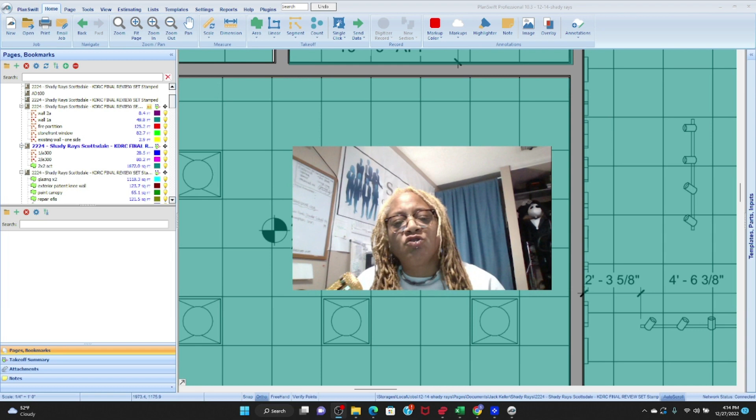Everyone. In this video, we are going to review all the sheets necessary to produce a drywall and framing estimate. Of course, we're going to do our three-step process, which is a very detailed takeoff, very detailed man-hour totals, and then a very wonderful professional Excel spreadsheet.

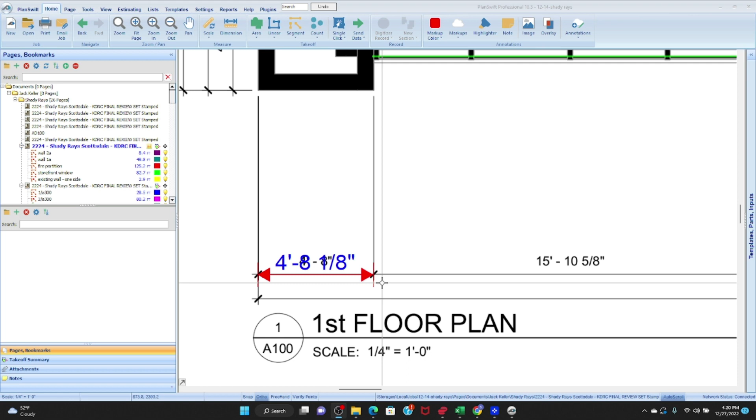All right, now we are looking at a small retail facility where we are going to do the takeoff here for the framing and for the drywall. And of course, if we are the framer, we need to look at the floor plan, make sure it's to scale, check the scale, which we did here, and start looking for any description that tells us the types of walls. Because this is already an existing facility, we need to be thinking about a few things.

First, the new walls that are going to be built are going to be marked out like these are here. These are wall tags telling us that we have wall 1A and wall 2A. And so somewhere on this description or on another legend or another detail sheet, it's going to give us the description of what wall 1A and 2A are made out of.

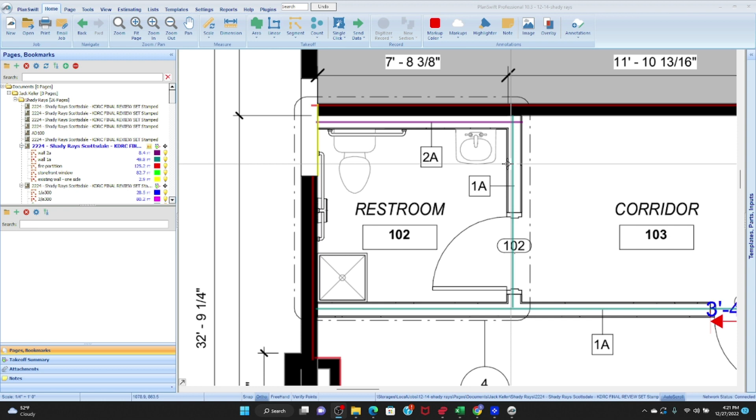And the one thing to always be aware of, whether they call this wall 2A, 1A, or whatever, you want to make sure you note which of the walls have drywall on both sides or which do not. It appears that wall 2A is up against an existing adjacent wall, so you want to make sure when you are determining that. But then again, the wall legend should tell you that wall 2A is a new wall that has drywall only on one side.

One other thing you need to always make sure to do is to look at the specifications for the finishes, and that's where our drywall would be noted, in the finishes division, and that would tell us what level of drywall finishing this drywall should have. Okay, and that's very important. Level 5 is very labor intensive, so your labor rate for that is going to be much more.

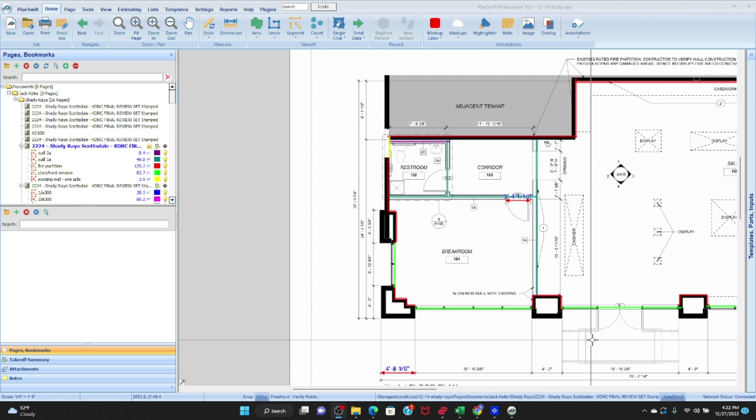Okay, and so we're going to break this video, like we do all of them, into 3 parts. Our first part is always a very detailed takeoff using a digitized software.

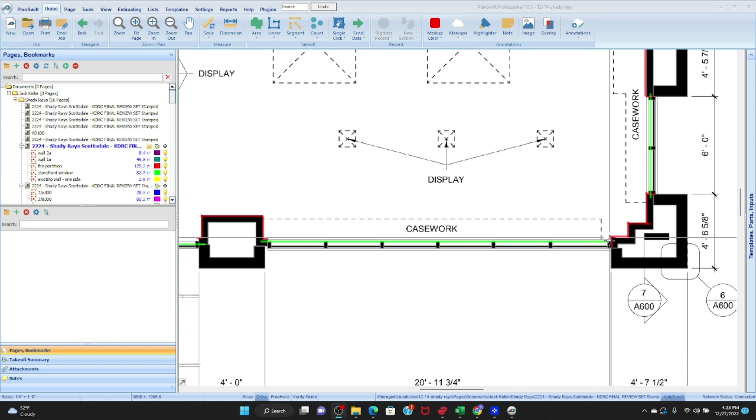Now, again, when we have an existing building, we need to always look at the new wall construction. We always need to note what is going to happen with the existing walls. Do we need to finish those existing walls? And in this case, we have a good interior elevation marker. So what does that do? That tells us, if we look at image number 1 on page A400, we can see the finishes or how the wall is here. And 2 shows us all the wall finishes here, right? 4 shows us all here.

And so I'm almost certain, anytime you have a renovation, you have to prep the existing wall. So is that part of the demo work? And we did not complete the demo work for this. So those are all things that the drywall person needs to be thinking about. All existing walls, do I have to prep those for new paint, or is that something that's not even in my scope of work? But again, the specifications are going to tell you.

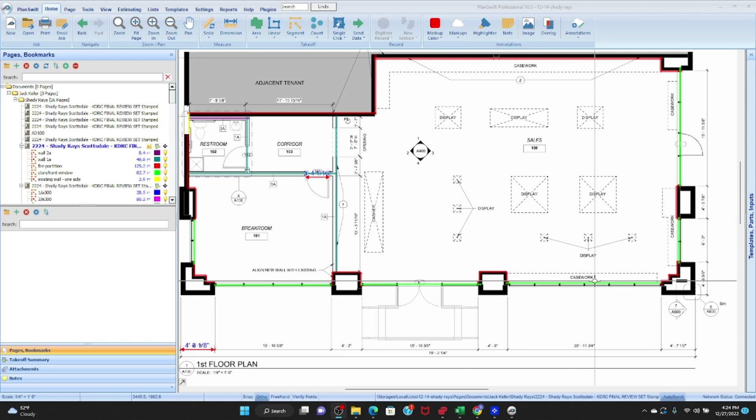Okay, so let's look to see what types of walls, wall 1A and 2A. And this again is step 1 of our 3-step process. Step 1 is always a very detailed takeoff. Okay, step 2 is what? Going to a cost book that's based on industry standards, getting the cost of material, and, more importantly, getting the man-hour rates based on industry standards.

That's where our 3-step process is always going to help you win, because you're going to have a reference guide to tell you, based on industry standards, how long something's going to take instead of guessing. And you never want to do that if you're doing competitive bidding.

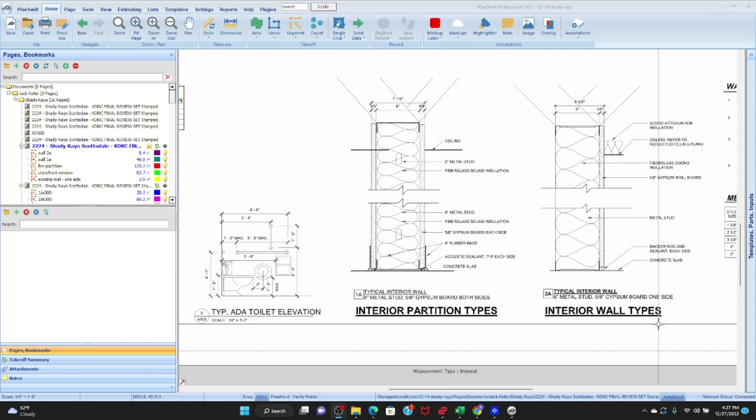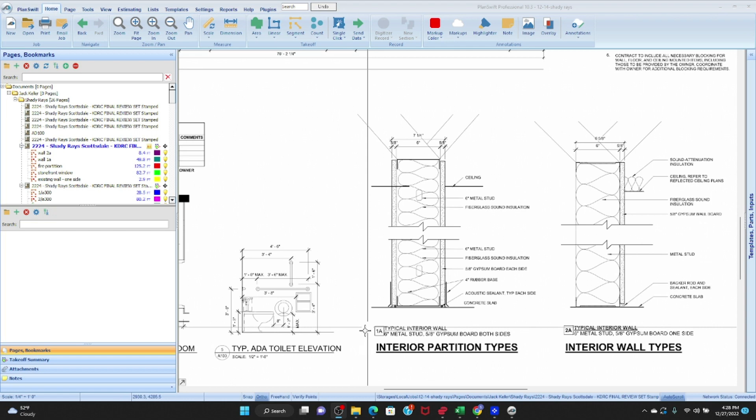So let's get back to framing. We know from our interior partitions, interior wall types, it's going to show us here. Looks like they're all going to be braced at the roof joist. That's usually what we have going on right here. We know the walls are going to go about 6 inches above the ceiling. Well, in this set of plans, we really don't have a good section view to tell us the exact height of these walls. But we know that wall 1A is 6-inch metal,

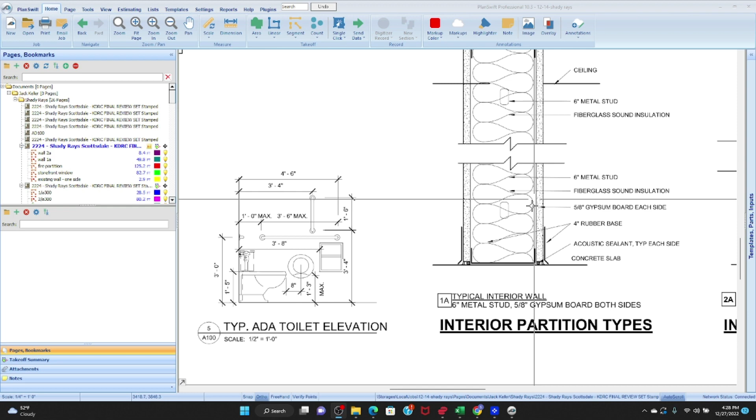insulation, acoustical sealant, typical on each side, top and bottom, so we do length times 2 for how many linear feet of sealant. And then the insulation: the square feet of insulation would coincide with the same square feet of framing. But if we are doing drywall on both sides, the drywall square feet would be twice the framing. So that's wall 1A. Wall 2A is the one up against the existing where we only have drywall on one side. Okay, so that's easy.

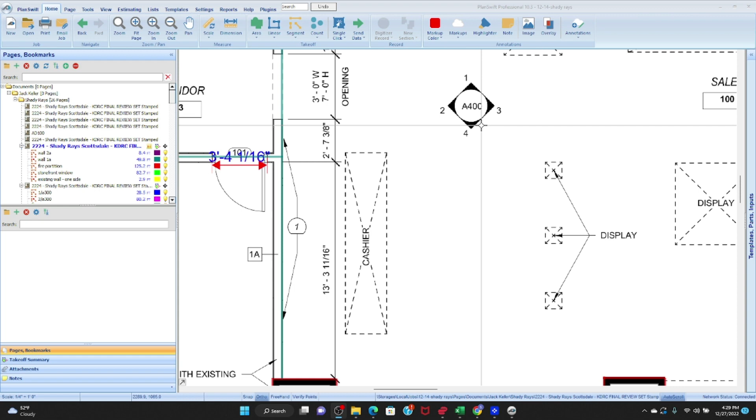And then we marked out the existing walls and what we need to do with those. So we look in the specifications under the finishes for drywall, because it will state whether the painter has to do that, or if that's part of the demolition scope of work. That's very important. But as far as new walls, the only new walls are the ones we have in blue, and this is how they're built.

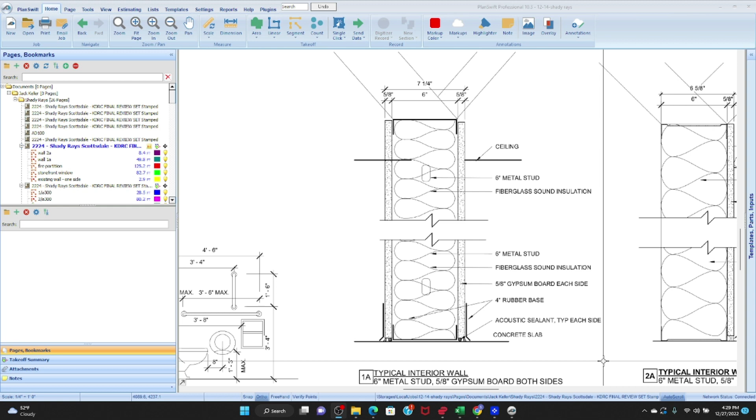Okay, so the first sheet the framer looks at, of course, is the floor plan. That's all the new walls coming up from the floor. Then we have to transition to walls coming down from the ceiling, or any ceiling framing. So we're going to go to the reflective ceiling plan.

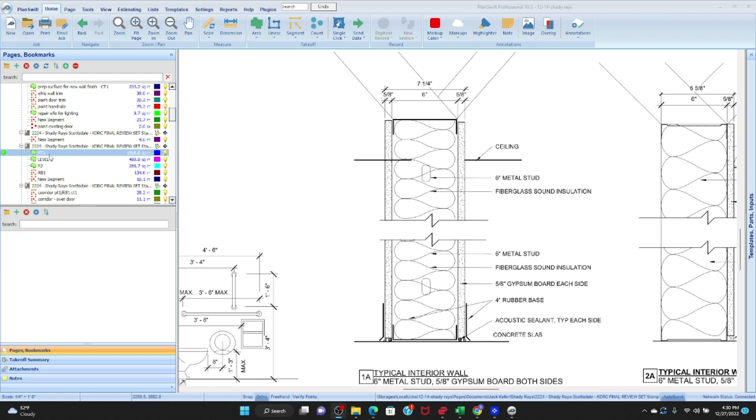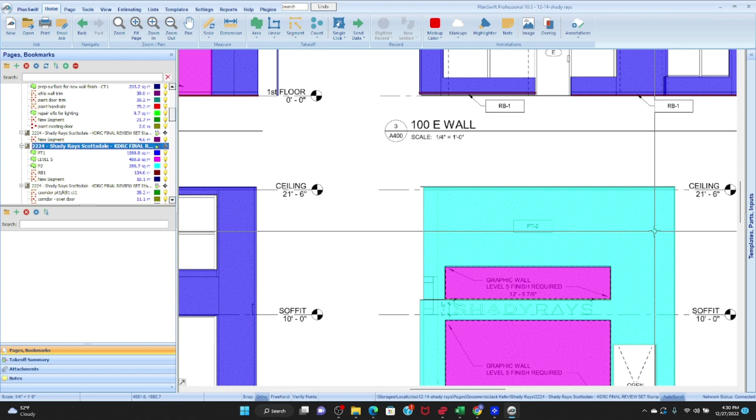Now this is our interior elevations. So all of the existing walls, I know the painter has to paint them. So I need to find out if I, as the person installing new drywall, have to be the same person to prep this existing drywall for new finishes.

All right, so here's the ceiling. In terms of drywall, there is no new drywall and no new framing for the ceiling. The only thing we have for the ceiling, even in the bathroom, is the acoustical ceiling tile. Now, remember I said that we did not have a height or section view to determine the height of our new walls.

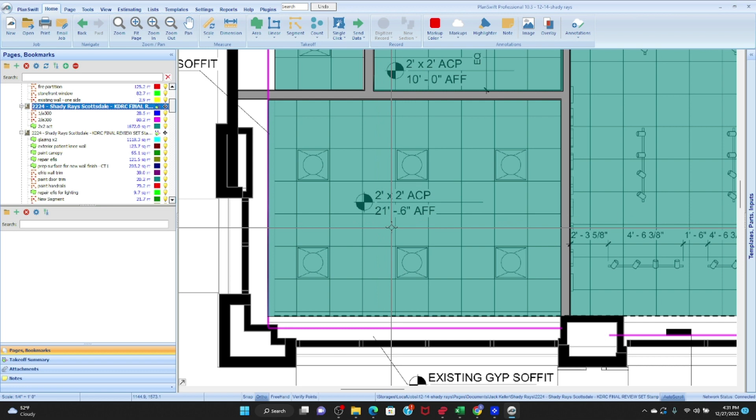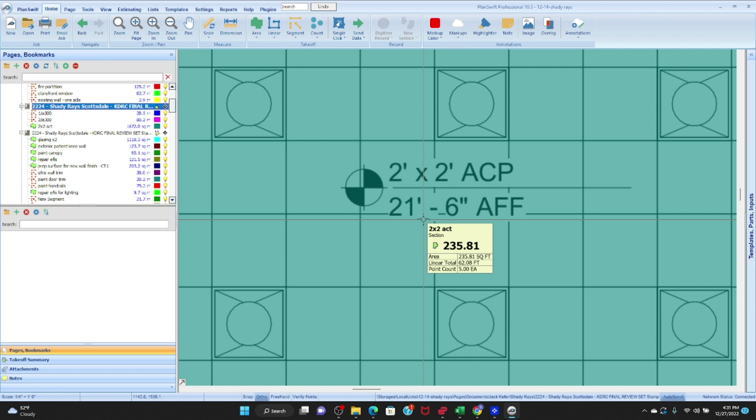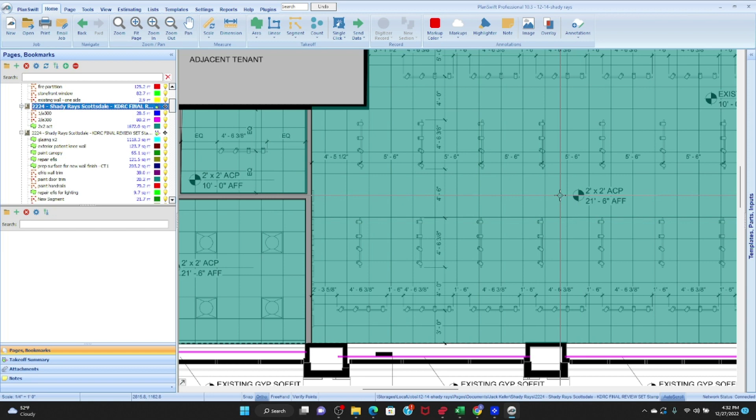So what you can do is go to the reflective ceiling plan. Its job is to mark each ceiling to give you the ceiling finish, which in this case is 2x2 acoustical ceiling tile, and the height of the ceiling is 21 feet 6 inches. So I'm going to use, and I'll tell my client, a 22 linear feet ceiling height. And as far as finishes, if I'm doing them, this is all acoustical ceiling tile, so I need to get how many square feet of that. That's what the reflective ceiling plan is for. But also, I have the existing soffits.

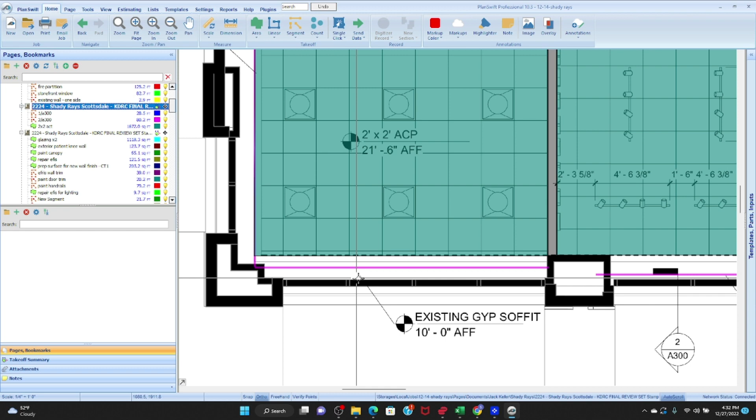Okay, and so I need to see, as far as, again, prepping those, is that part of my demo scope of work? Or is that something that should be included for the painter, or something that should be included on the drywall scope of work as far as prepping existing walls and ceilings? So that's the only question for that.

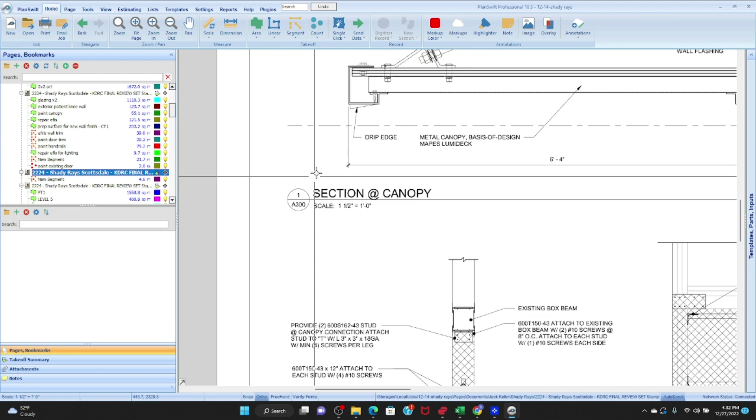And then let's look at the section view 2 over A300. Okay, so 2 over A300 is going to give us this. So this is the soffit that's on the interior. So in terms of painting, I would need to adjust my wall prep numbers to account for this part of the soffit and this part.

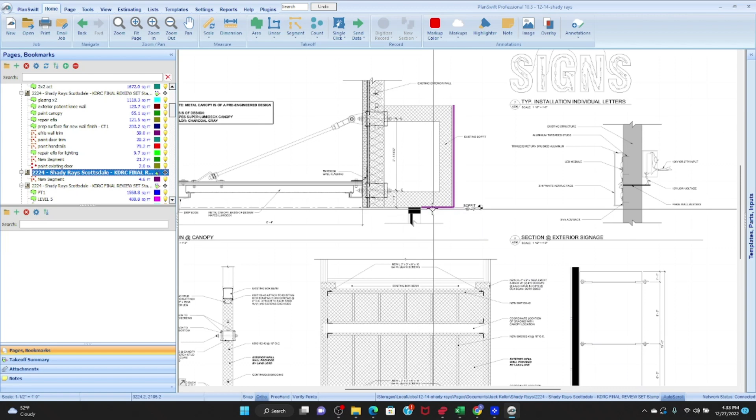And as far as, so this is the height basically, and then the length is the full perimeter of the building, basically from here to there. So length times that height is how many additional square feet of wall prep, ceiling prep we need to add to any of the drywall prep for the existing drywall.

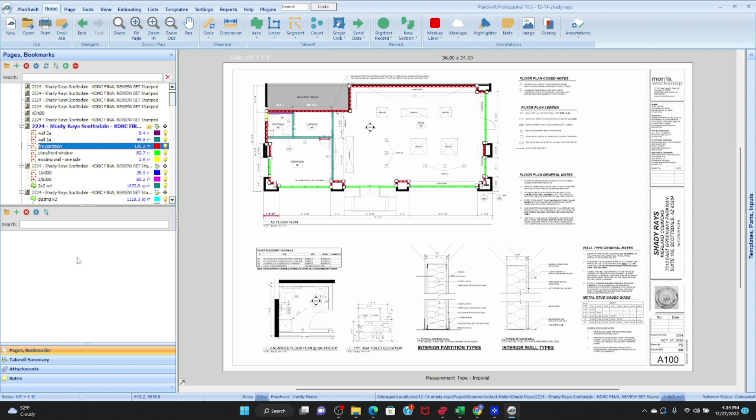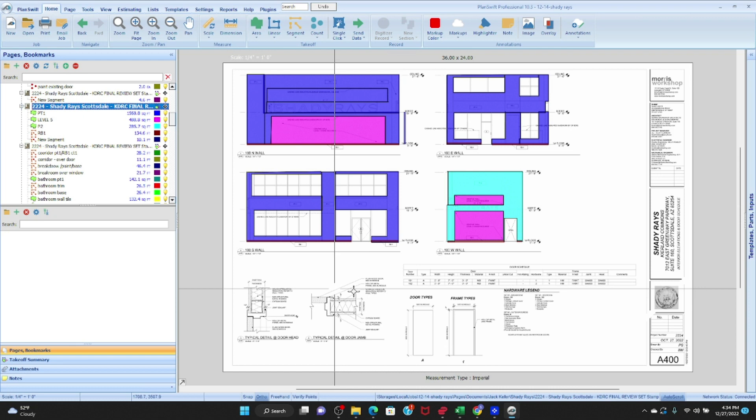Okay, and then last but not least, you need to look at what types of new door frames. We'll just go through and look for the door schedule. And this is a tiny set of plans. And here it is right here. So anytime we have new doors, it's always going to give you the schedule. So I know here we only have 2 new doors because that's all that is in this list of doors.

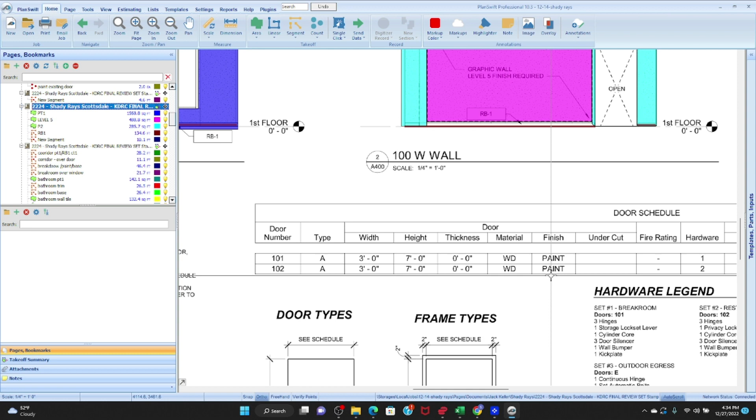I know that the door is wood. See the door material is wood. We're going to paint it, so the painter needs to know that. And the frame for our framer is hollow metal. Okay, and it's also painted, but the painter needs to know that. And so this will give us the description of the door frames.

Okay, so in terms of the detail takeoff for a framer, and usually all of my framers also do the drywall. And so first step is always your detail takeoff. You need to be mindful, especially with something that's existing. You need to consider the prep for your drywall for existing walls. Is that part of the demo scope of work? Is it part of the painter scope of work? Or is it part of the drywall professional's scope of work? So that's really the only thing in addition.

All your new walls, that's what you're going to build. And then all your new ceilings, that's what you're going to build, if there's anything there to be framed, of course. And then your third thing, you're going to look at your door schedule to make sure you know what types of door frames, and not the doors themselves. Usually the framer doesn't install the doors too, but in really small projects, they may do a lot more than in a larger project. But for certain, the framer will install the door frames.

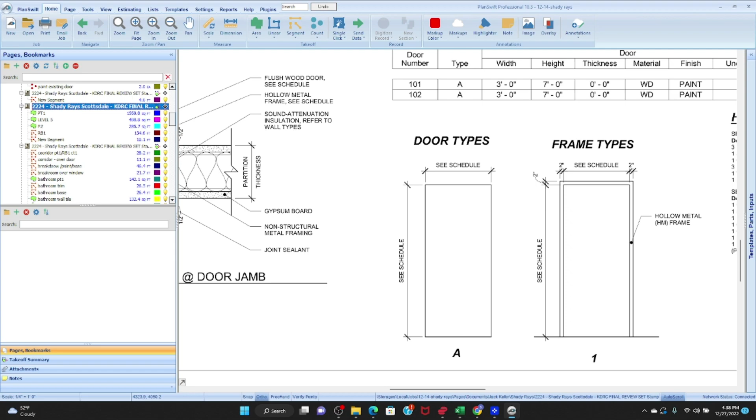Okay, so I hope you enjoyed the framing and drywall takeoff, which is always the first step in any professional cost estimate. Make sure to look for pricing and determining man-hour totals for the same project. It'll be coming up soon.